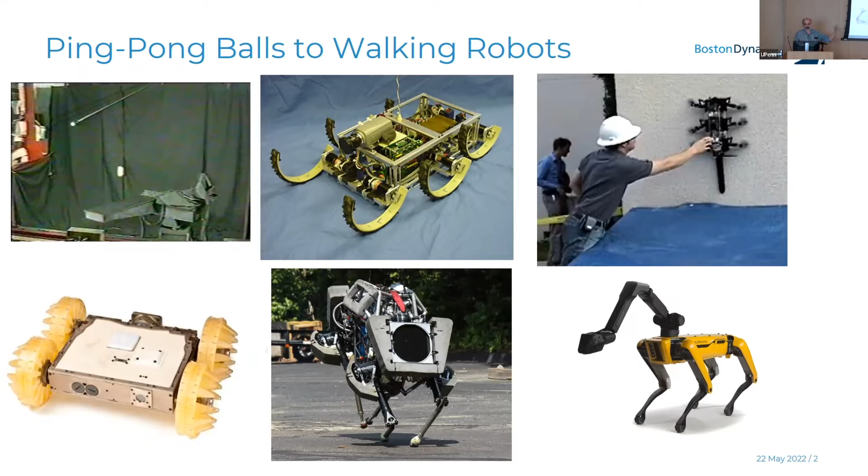Let's see if we can watch some videos.

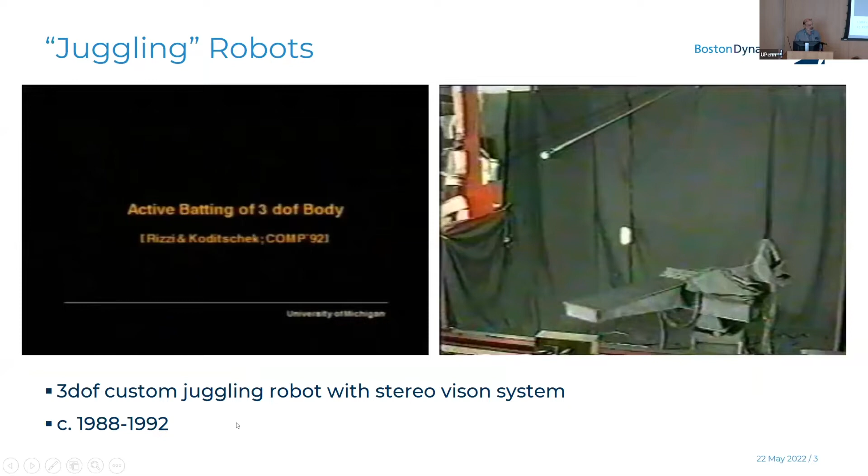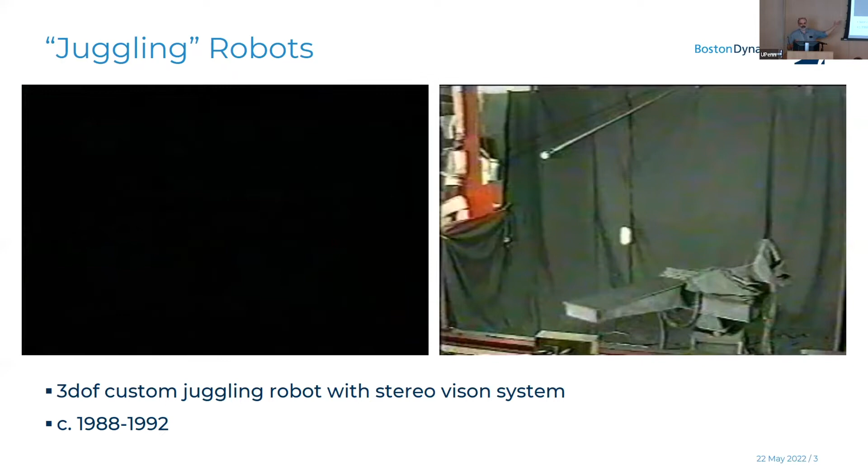This is the original 3DOF juggler, back in the Yale lab. This is, I think, one of the first machines we got any real publicity for. Annie found the New Haven Register article that cited us, with a lovely picture of me posed by some photographer leaning on the robot. This was the first time we had one of those phase regulation machines. A black robot in a black room with a white ping pong ball is wonderful photographic material.

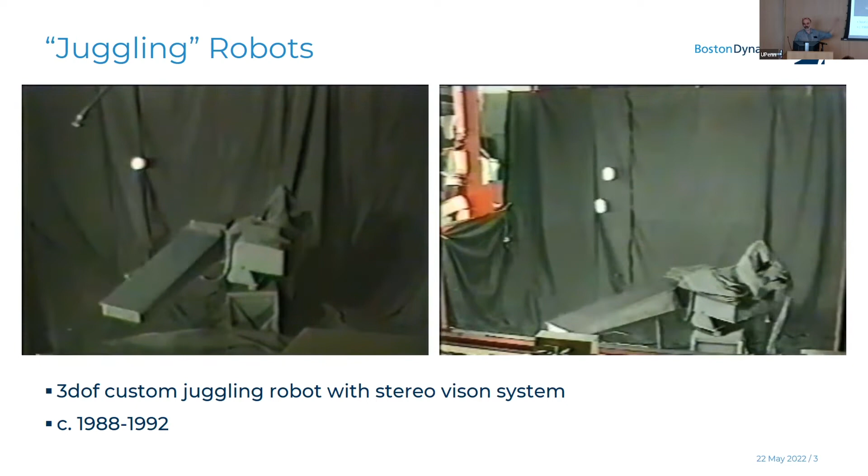But as Noah pointed out, the real thing Dan taught me, or that Dan and I learned through doing this project, was how to solve these phase regulation problems. At the time, we were watching work coming out of Raibert's lab at MIT and were totally enamored with the ideas of walking or hopping machines, but we were stuck with juggling. I think we found a bunch of really interesting problems in that space that turn out to be very much related.

And then, as Noah pointed out, the culmination of this, I think, was some of the work that showed up in Rob Burridge's thesis. This is video from his thesis on these ideas of sequential composition, how to take lots of simple behaviors and sequence them together in a smart, principled way in order to produce more complicated behavior.

That's the moral equivalent of Noah catching his juggling bag on the back of his neck, only done by a machine. The machine, of course, doesn't have human brains or hands, so it can squeeze the ball but can't hold it to control things.

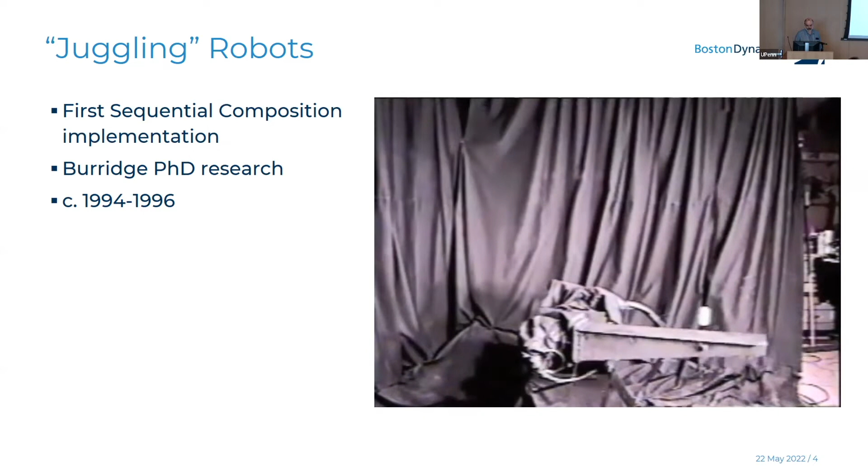So how did we build these things? I think I spent probably a third or a half of my career as a graduate student not actually working on robotics, but working on computer architectures and programming models to make these things work. This is around 1990, and we were trying to build this machine that has a vision system, some computer smarts, and a high performance control system. Lewis described that part of his thesis, which was focused on model-based adaptive control for the robot.

Lewis's thesis actually lived in the middle of all this. All of this stuff was actually built by Lewis. The robot we used for juggling was one of the robots he used for his experimental work. I do have lovely memories of large dumbbell-sized weights flying towards various researchers sitting behind the protective glass in our lab. But we had to build a vision system, we had to do all this stuff.

My predecessors, Martin and Lewis, had started to work with a professional engineer on these computer systems called transputers, that were going to revolutionize parallel computing. I think they still do, sort of, but they were a commercial flop. Nonetheless, I still have a paperweight in my office, which is one of these things - I think I had 17 or 20 of them all plugged together in a 19-inch rack, with a little duct tape, some loose wires everywhere, and lots of wire wrap. But I'm very pleased to still have one of those.

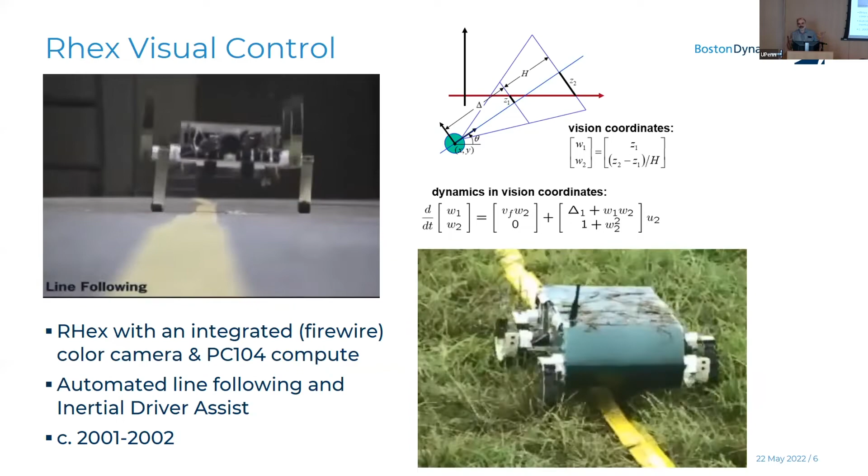Nonetheless, we went on. RHex got created - I wasn't actually part of that, but I was fortunate enough to get involved with how we did higher level control on RHex. Computing evolved: we went from all of these transputers plugged together in wacky networks to PC 104 computers plugged together in wacky networks with more wire wrap bits holding them together. Now we're adding an integrated camera, which was only about this big, not quite cell phone sized yet, onto the robot. And we're actually starting to do some higher level control on these machines.

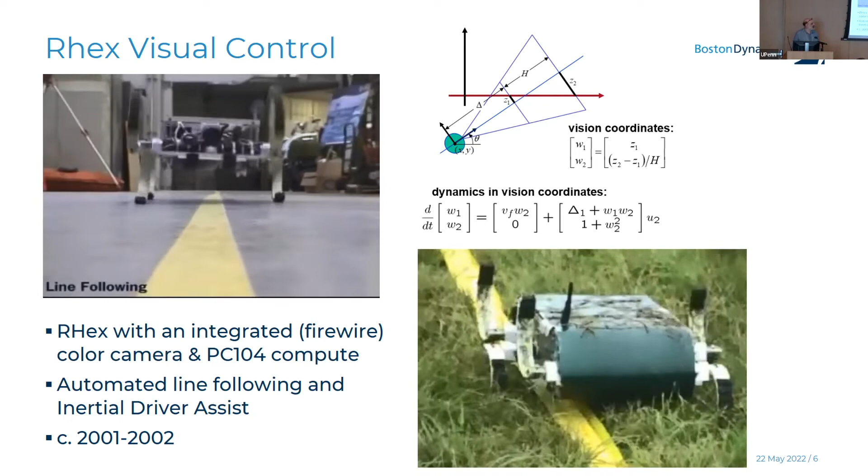The same ideas all permeate this - it's all about phase regulation and paying attention to the dynamics and the interplay of the dynamics with the sensing. We were able to produce behaviors that basically made the robot easier to drive, whether it was through automated visual guidance of the robot or driver assist kind of features. At the core, there was some fundamental science that drove that.

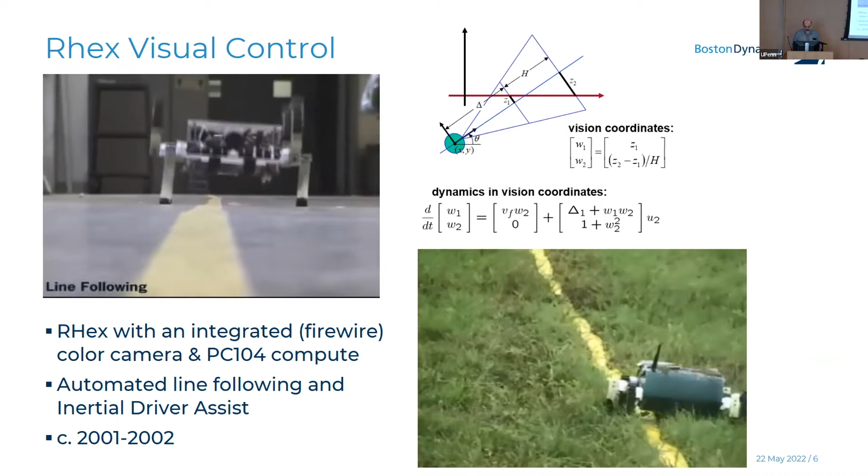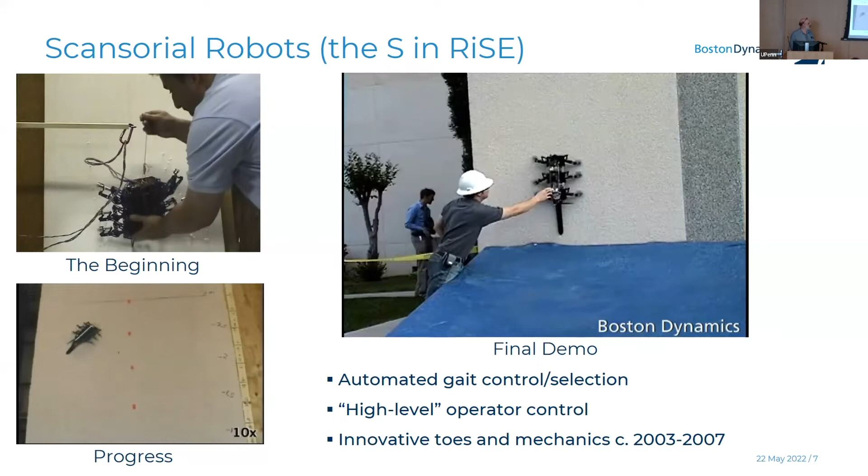Nonetheless, about 6 or 9 months later, we actually had the robot climbing these vertical, easy to grip surfaces and being drivable. Here's somebody actually watching the robot and steering it, giving it relatively high level commands, but the robot's doing all of the details internally to figure out how to move the feet. Actually, this was the start of Clark Haynes's thesis work that we'll see shortly.

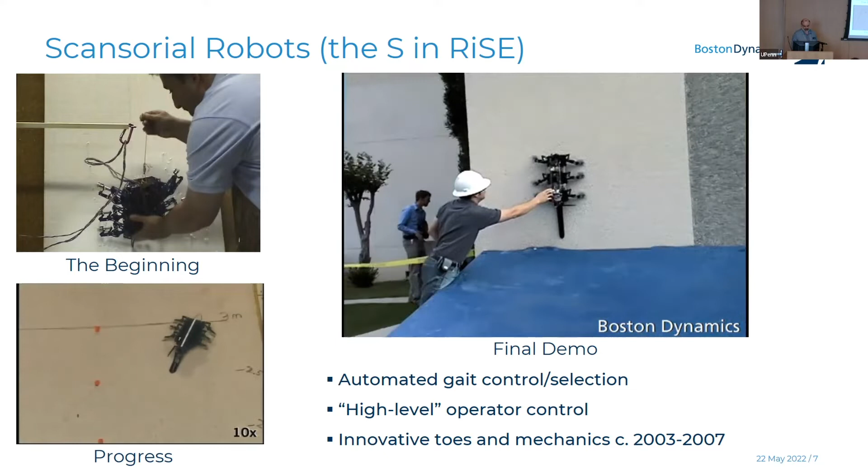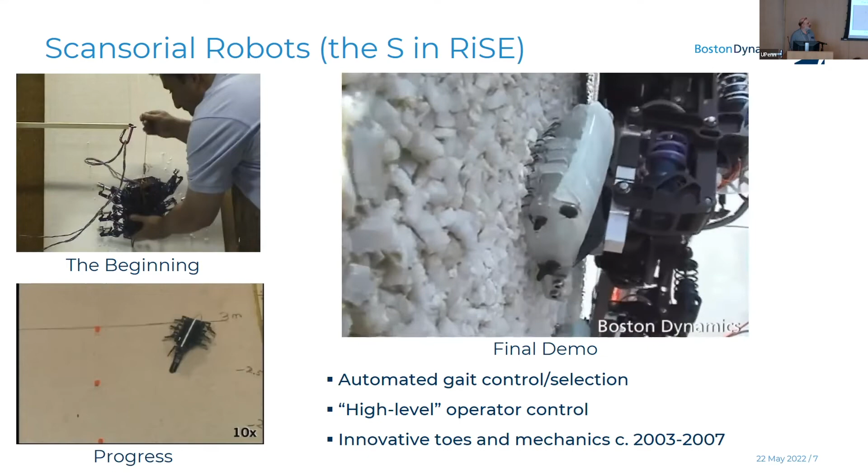In the end, after a lot of work on the control and behavior of the robot, automating how the robot sequences all of its foot motions, and a huge amount of progress on the mechanical design of the robot itself thanks to our collaborators in the biomechanics world and the mechanical design world, both academically and the group at Boston Dynamics, we finally got to a machine we literally stuck on the side of a stucco building and said, go.

And I think it took about 15 minutes. Our test supervisors, the people at Southwest Research Institute, had laid out a large tarp at the base of where the robot was climbing because they were convinced we were going to fall off the building and they wanted to catch all the parts so they could take pictures of them. So they were very, very sad when the robot actually succeeded and got to the top of the building.

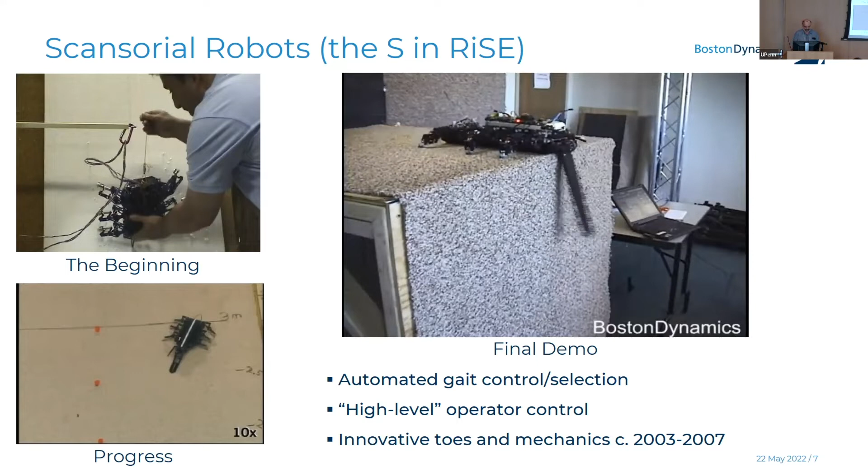No idea how I'm doing for time here. Oh, we're not.

So that brings us to about 2006. Much to Dan's chagrin, this is when I decided to leave academia and moved from Carnegie Mellon to Boston Dynamics. Dan gave me many, many lectures on how this was a horrible disservice I was doing to the world. And I believed him for the most part.

I think maybe about 3 years ago, Dan might have said it wasn't a bad thing that I had moved. But I was convinced that I could be more productive. For me, I think it was a thing that I learned very early on working in Dan's lab, working with this very close community of graduate students and faculty that had formed around doing robotics at Yale, that the power of research came from the collaboration. It came from working across disciplines and listening to different people. That was one of the things that had drawn me to Carnegie Mellon initially, because there are lots of people doing robotics research, and I made great friends and great collaborators while I was there. But we just couldn't quite do things at a scale that was really satisfying for me.

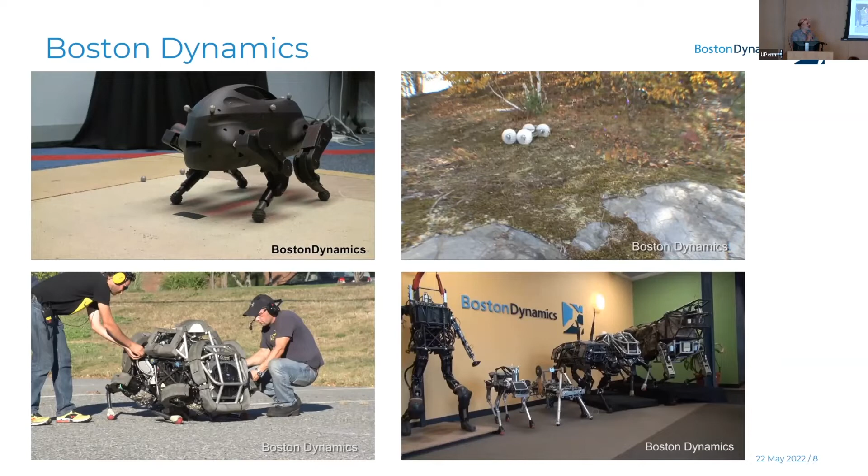So I've been at Boston Dynamics for the past 16 years. These are just some videos. Oops, I wasn't supposed to play that way. Oh well, we'll let that play that way.

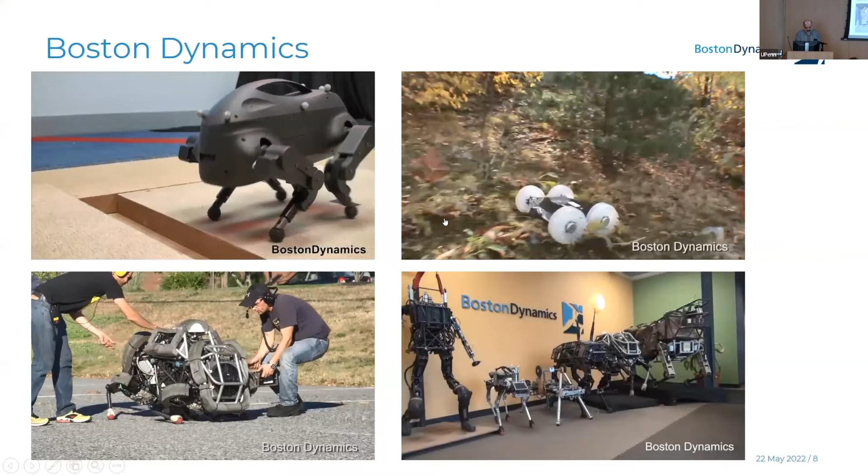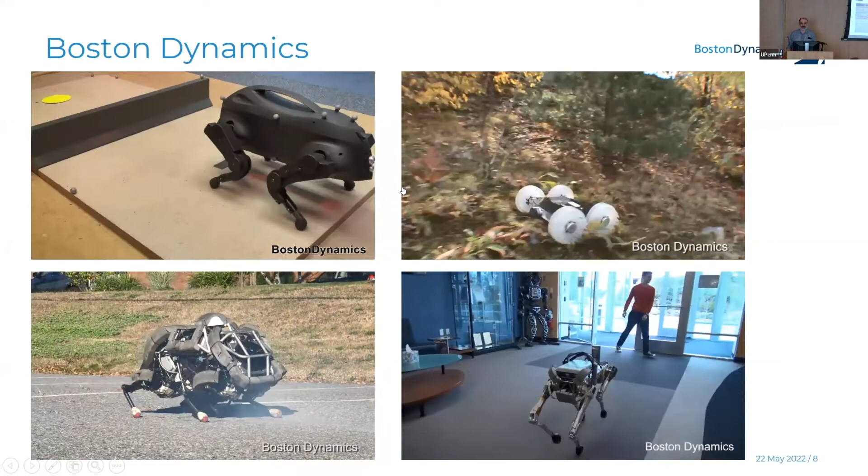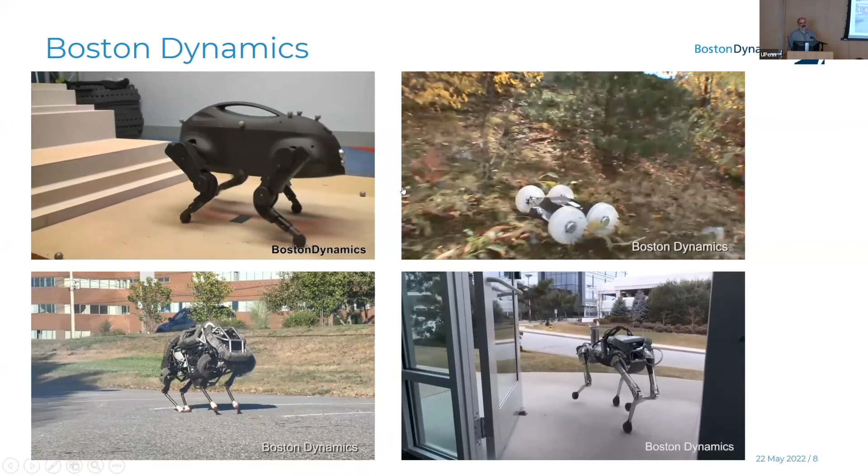I walked in the door at Boston Dynamics, and the first thing I had to do was ship these little dog robots off to academic partners. I had actually written half of the proposal at Carnegie Mellon before I left. All of a sudden, I was the equipment provider back to Carnegie Mellon and 7 other groups around the country, including a group at Penn. My responsibility here was to, in 3 months, design and ship the interface that everybody was going to use for these robots.

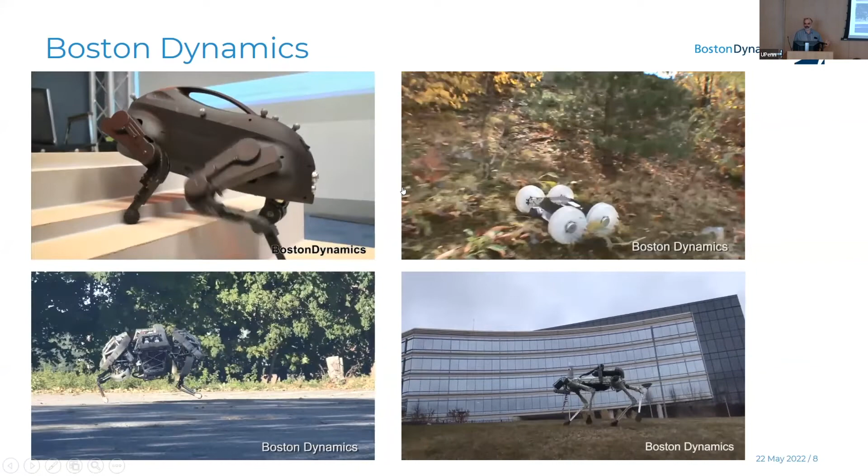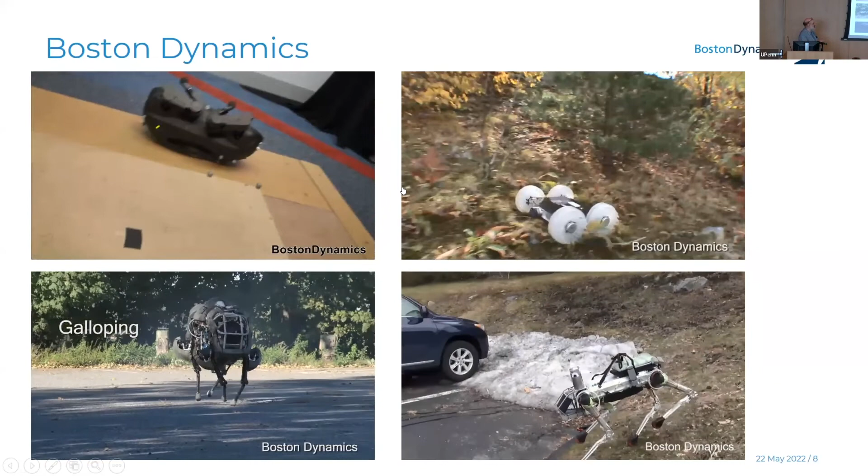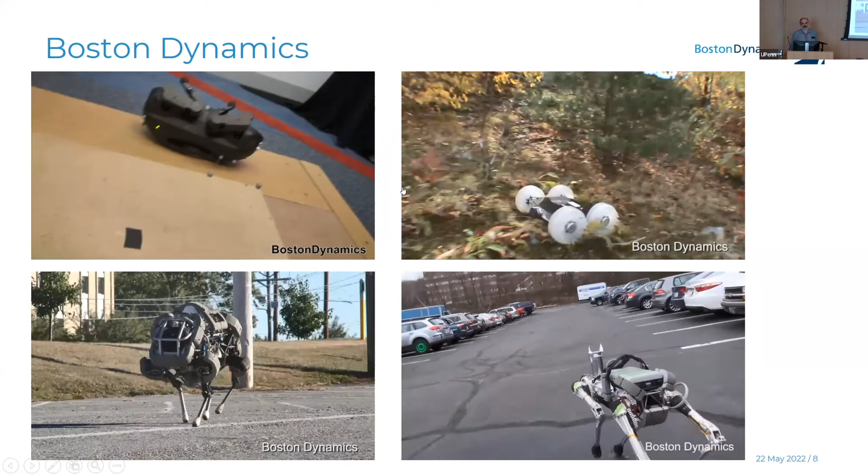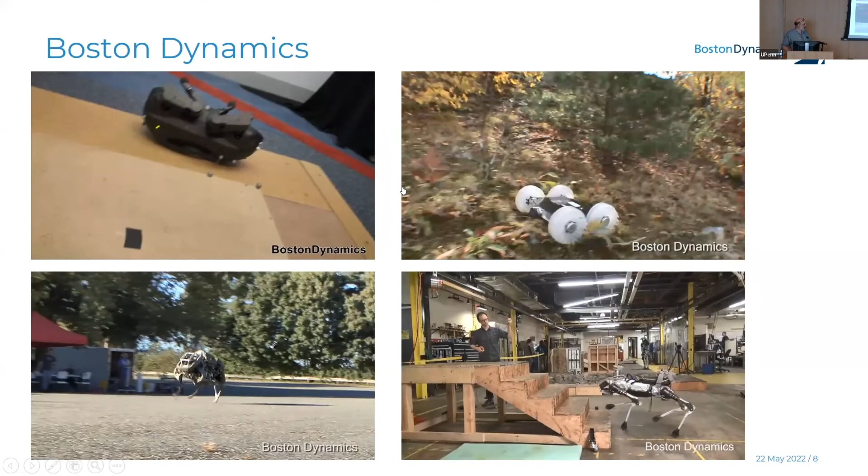That was very much influenced by these ideas I had learned about what it means to actually program a robot. We went on to build things like Wildcat, or Cheetah, a very fast running robot that could run across a parking lot at 20 miles an hour. I will never turn the audio on for these videos because the machine was literally about 120 decibels. If you see any people in any of these videos, you'll see them wearing big racing radio sets so that we could actually talk to each other.

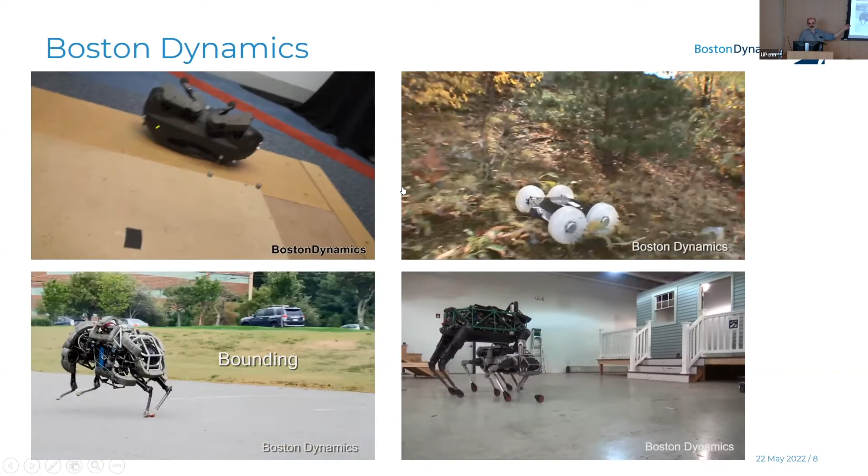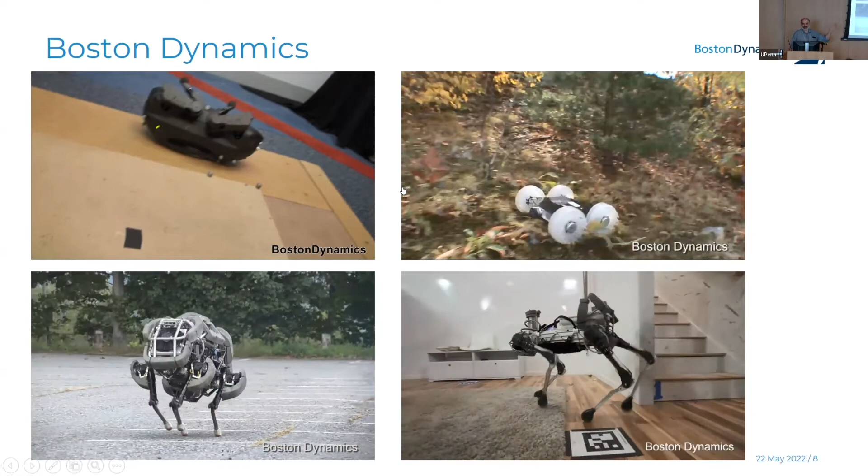But this was the stuff that was totally motivated by the juggling work. It is all the phase regulation problems Noah talked about, all these ideas about programming work. Plus, it's combined with all this other cool stuff I started to learn as a grad student about these non-holonomic systems. This is a momentum-constrained system. It's rarely in contact with the ground, and it needs to do the right things both while it's in contact with the ground and while it's flying through the air, in order to maintain its balance and keep itself well-oriented.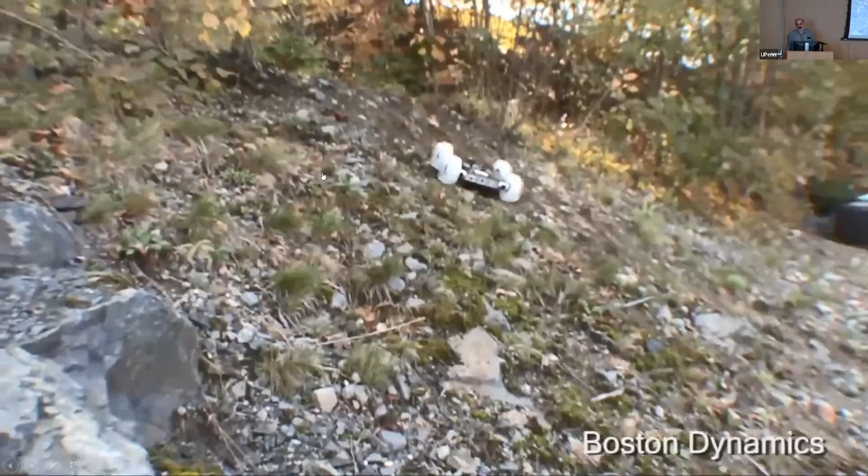I'll play this one full screen the way it is, because I think it's the ultimate example of that. This is not a fancy legged robot. It's not a juggling machine. This is a robot we called Sandflea. It's a little 4-wheel differentially driven car that you can drive around. But it's got one really big trick that most little differential drive carts don't have. When it actually comes up to an obstacle, rather than trying to climb over it, it can actually hop over it.

So it points itself up and then it flies. Now, that time you'll notice it landed on its wheels, right? Watch this one.

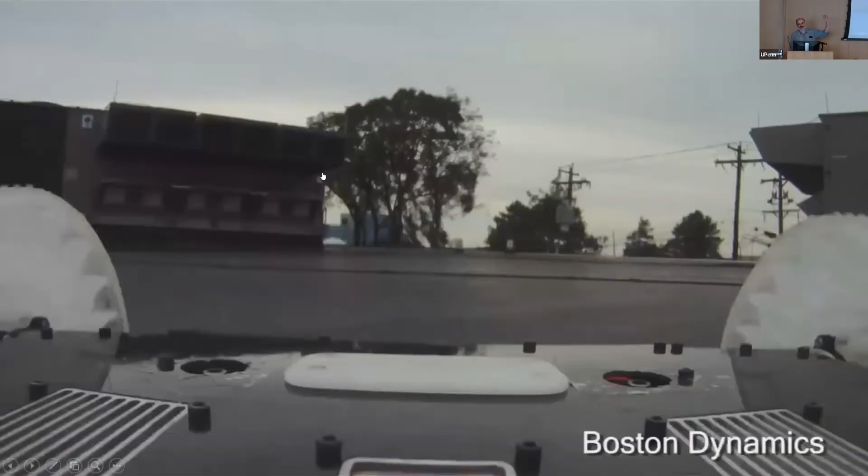This one actually goes up and starts to turn over backwards, and it stops. Now, somebody taught me some physics, and things that fly aren't supposed to do that, right? Well, what were we doing?

We were actually using the wheels of the vehicle as control moment gyros to control its attitude in flight. So the drive system of the robot is designed both to let it drive around, plus spin things fast enough that it can actually absorb momentum in flight. You combine that with a super smart mechanical engineer who did design work on the wheels so that they

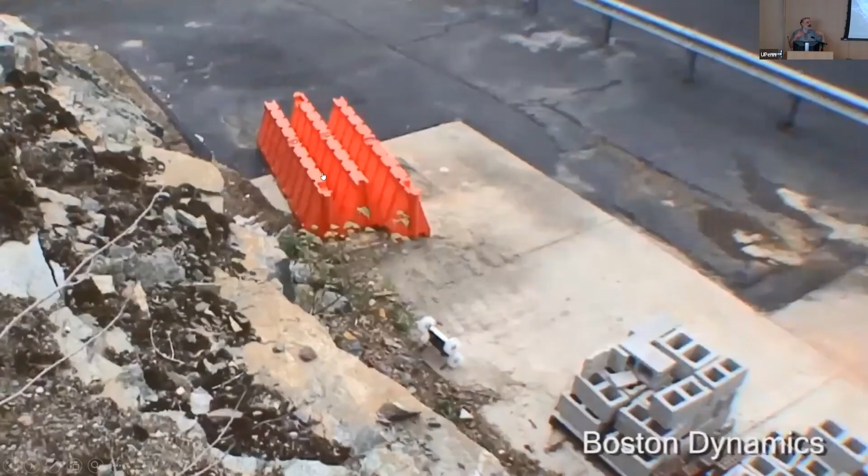could absorb all this landing shock. And suddenly you have this thing that you can literally launch 10 meters through the air, have it land and bounce not more than about half a meter from where it struck the ground, because you combined the sensing with the control system and the smart design to get that all to work.

Where does that take you? Well, if you paid any attention to what we've been doing at Boston Dynamics in the last couple of years, we're building Spot robots. This is our first cut at a truly commercial, useful quadruped.

Personally, I've been working mostly for the last probably about two and a half years on our manipulation efforts. So how do we combine manipulation with all this locomotion work that we've done? This video gives you a quick overview of some of that.

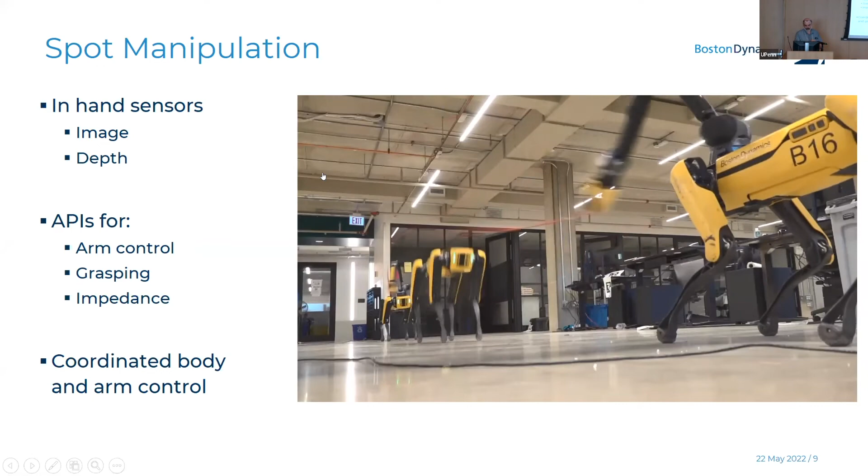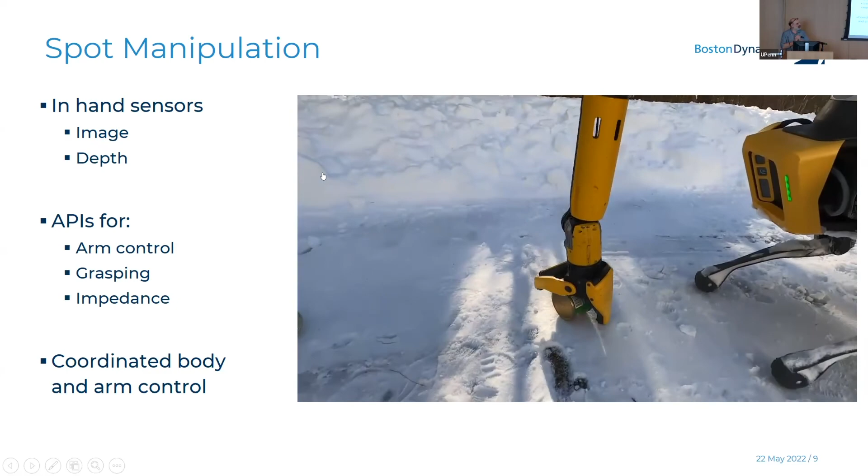So here's 3 Spot robots acting in coordination, not juggling, jumping rope, similar. But more interestingly, a robot with an arm autonomously picking up the trash, right?

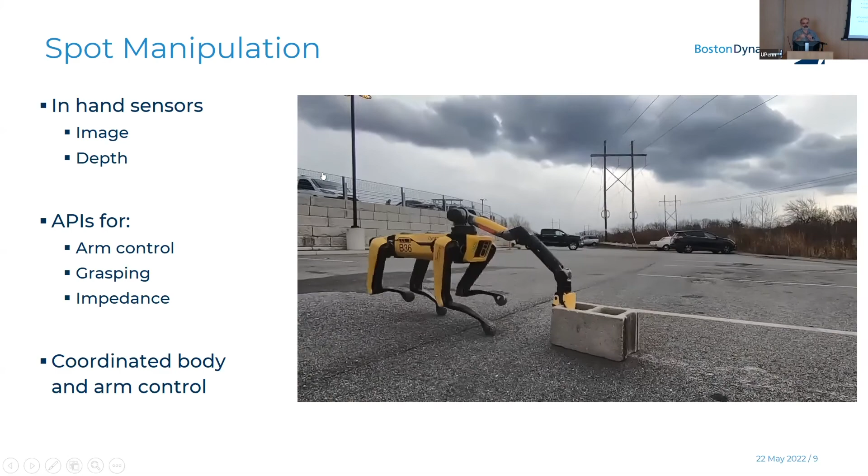I'm cheating a little bit when I say fully autonomously. There's a user who's saying, there's a thing there and a thing there and a thing there, go pick them up. But that same machine can go drag cinder blocks across the hall. It can do exciting chalk drawings on the pavement, right?

And it really is becoming, I think, one of the first functional legged mobile manipulators that's available in the world. And I'm super excited about that.

But what do I get from all of this experience? Well, when I started working with Dan, robots were a bit of a fantasy, right? I think thanks to some of the groundwork he's laid, some of the work the people in this room have done, others have done,

I think robots actually can work in the real world these days and do useful things, and not just menial tasks. They can do real tasks. Feedback and composition of feedback really helps with programming those systems.

If you followed what we did at Boston Dynamics, there were the earlier walking robots, Big Dog, LS3. Those machines were very hand programmed. It took a team of a lot of people to keep them running and keep them balancing.

When we transitioned to Spot, I was fortunate enough to be able to tell the people who were holding the purse strings, no, we're going to wait 6 months and not have a demo for a little while. And we completely re-architected the underlying balance control systems using a lot of these ideas that I started to learn about when I was a grad student.

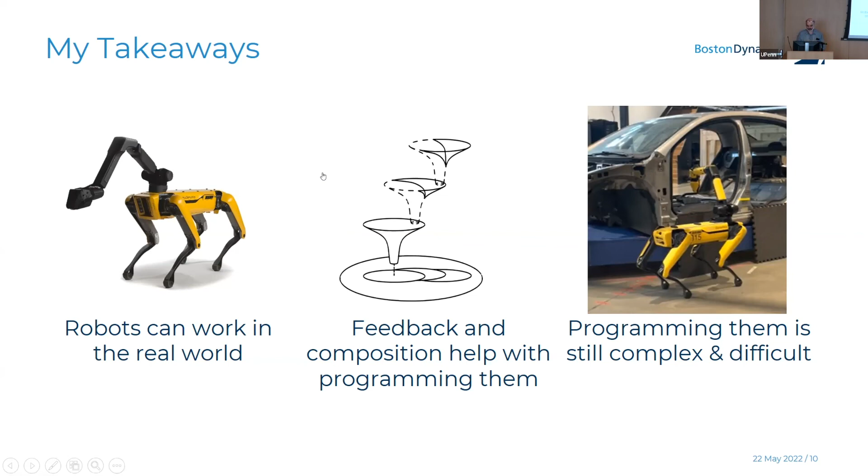This is a picture of us in our lab doing an automotive inspection task with a robot. And we're going to try and deploy this as a solution for a customer in the next couple of months. And there's still a lot of handwork that has to go into those systems. And I'm eager for us to figure out how to eliminate that.

And this is probably the best bit of legacy that I can offer for Dan for what he's done. My group at Boston Dynamics does an annual superlatives event, and we nominate each other for great things, interesting things we say, memorable features of what we've done.

And I got this year most likely to tell you to remember the off-diagonal terms. And I think that really goes to one of the things I learned from Dan a long time ago, and that is to pay attention to the whole system, that it's not as simple as just picking out the one interesting or hard piece and working on that. Pay attention to the whole thing.

And I hope he's imbued all of you with that. I really appreciate it, and can't begin to thank him enough for the influence he's had on my life and my career. Thank you.